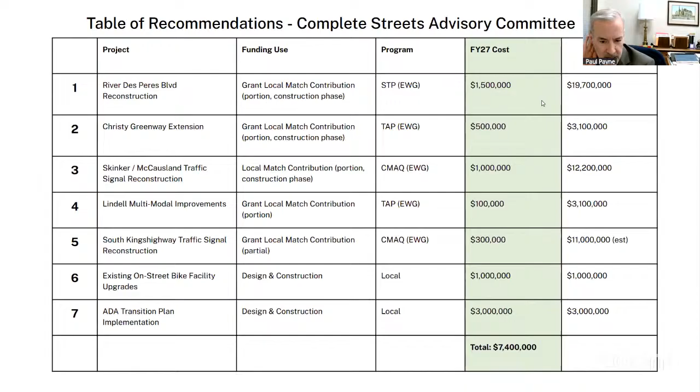Could we ask questions along the way here? Yeah Scott, do you have natural stopping points? John and I can take questions on every slide, on every project, that might be the best way to do it, since people have questions on each project. So I think we'll describe the project and the phase it's in, and then we can pause for committee questions on each project, if that works for you, Paul. Yeah, that's fine. Either put it in the chat, which I can see, although now I can't see if you raise your hand. Scott, you've got that on screen. So anyway, we'll get to it one way or the other.

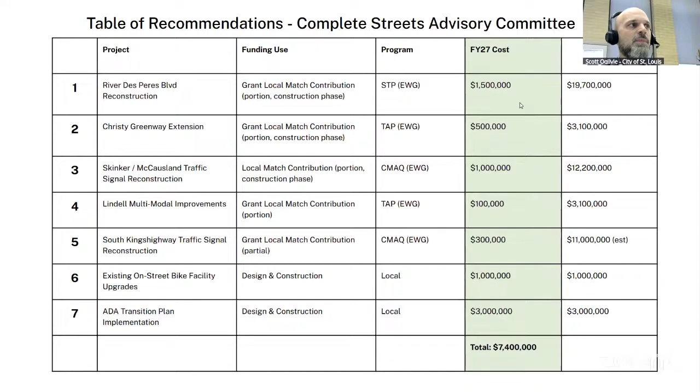Here's just a table of the same projects I just listed, with the fiscal year 27 funding request and the total project cost. Each one of these is a slide, so we'll get into more detail as we go forward. So the first project, this is one that already has a grant, an STP grant through East West Gateway. So the committee is seeking funding for some of the local match in the construction phase.

So a reminder of what this project is. This is a pretty significant reconstruction project for River Des Peres Boulevard from Lansdowne to Gravois. This section of roadway has really deficient overall roadway characteristics. It's a really old piece of roadway, poor pavement, extremely narrow travel lanes, lack of curbs, lack of guardrail in many places adjacent to the River Des Peres drainage channel. So this project would do a lot of reconstruction for just improved quality of roadway and much safer roadway.

There'd actually be a little bit of widening associated with this project, which is not very typical of city projects right now, but because this street is overly narrow for the amount of traffic it carries, there'd be construction of a center median to divide those two directions of traffic to prevent crossover type crashes. There'll be multimodal improvements, including much better bus stops in the corridor and access to those bus stops on the east side of the roadway, which are extremely dangerous to access right now, or in some cases almost non-existent. Guardrail installation in some locations, as I mentioned, and likely pretty significant changes at Chippewa, which are in design right now.

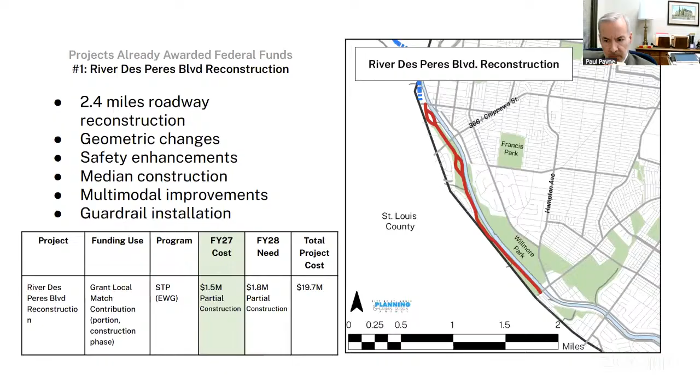I see Dennis has his hand raised. Hey Scott, what year is the construction on this one? John, do you have that handy? I think John's looking for it. I think this is roughly 2029.

So Scott, are you saying the city has already obligated 4 million, or is this the ask to complete this project? The city has a commitment to fund roughly 4 million locally, but it is not yet funded. So this fiscal year 27 ask is for what we're calling part of the construction funding, or part of the local match funding that's required to advance the project.

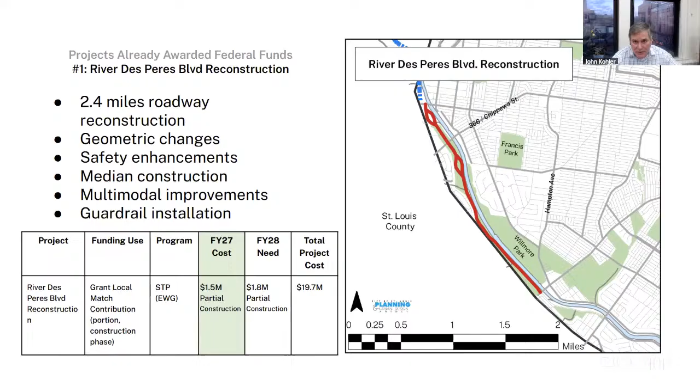Dennis asked about the construction anticipated start, and we are on track right now. It's scheduled to start in spring of 2028. Thank you. Okay, I don't see any other raised hands.

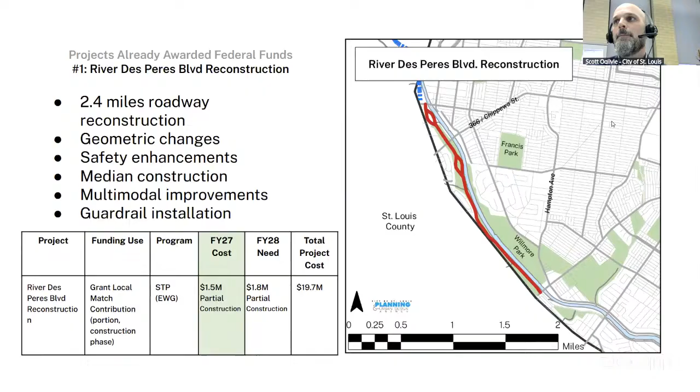So the second recommendation is the local match funding for an extension of the Christy Greenway. This is another project where the city has already been awarded a grant through East West Gateway, in this instance a TAP grant, a Transportation Alternatives Program grant. This funding is primarily limited to bike and pedestrian enhancements or improvements. This project would extend the Christy Greenway from where it ends right now at Holly Hills Boulevard through Christy Park, along Christy Boulevard to Kingshighway, where some intersection improvements have already been constructed that would link up with this greenway.

That's part of the Kingshighway ARPA corridor project. So this project would build a sidewalk-level greenway on the east side of the roadway, about 1.2 miles. The total project cost is 3.1 million, and the city share for construction is 500,000.

John? We are under design right now, probably about 25% complete. We anticipate construction start in the fall of 28. Thanks, Dennis. Is this GRG led, or is the city the lead agency on the extension?

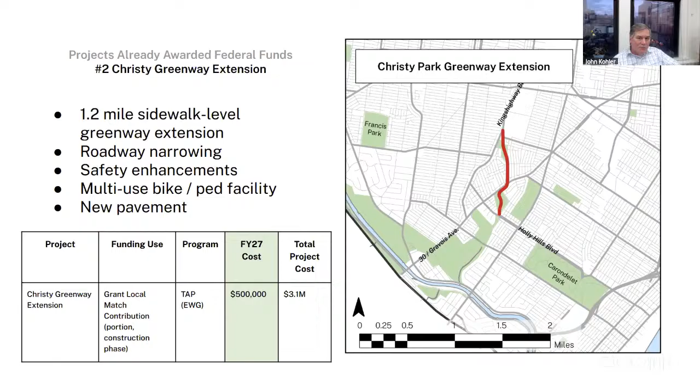This is city led, but GRG is not a funding partner in this project, though it connects into GRG's greenway system. Thank you. It also ties into the recently constructed new signalized intersection at Kingshighway, Christy, and Neosho, and it'll tie into bike lanes that were just constructed on Kingshighway as well.

Any other comments or questions here? Okay, moving on to the next project.

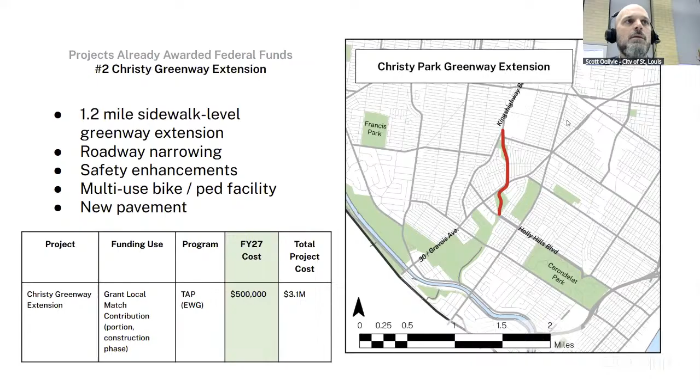Again, this is a third project that's already been awarded some funding through East West Gateway, in this case a CMAQ grant, which stands for Congestion Mitigation and Air Quality. This project is primarily a traffic signal replacement project along Skinker and McCausland, on the south end from Arsenal, to the north end where Skinker turns into Keeneland and exits the city. Approximately 20 traffic signals would be replaced through this project.

There will also be ADA and curb ramp improvements wherever the project is doing signal work. North of Delmar, there are additional sidewalk and pedestrian safety improvements that will be part of the project. Where the roadway gets really wide, it goes under the Metrolink bridge, and there's currently some deficient or non-existent sidewalk conditions, so the project will make improvements there too.

This is partial construction funding, 1 million. Total project cost is around 12.2 million.

Just a general comment about these major signal improvement projects. We as a city have been very successful in building and upgrading our major arterials. This particular project is Traffic Management Enhancement Phase 9, and Scott will talk a bit about Phase 10 on South Kingshighway. These projects improve air quality along major arterials, reduce emissions, and are looked at very favorably by East West Gateway. We get cleaner air and a better timed corridor to minimize stopping at signals and improve traffic flow.

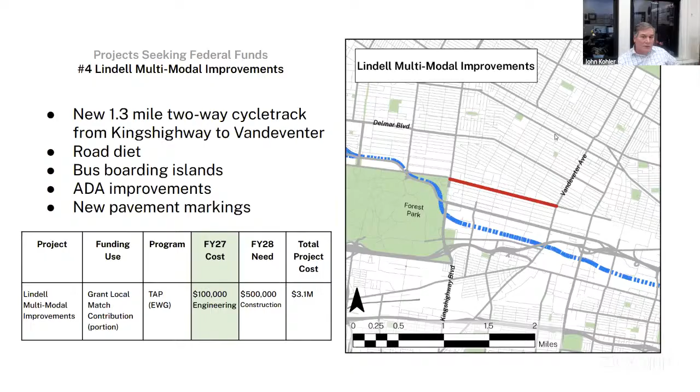This project partially originated through interest from the alderperson, a traffic study, and a public meeting held about two-thirds of the way through 2025, which helped determine residents' preferred configuration for the cycle track. It's also important to note that east of Vandeventer on Lindell, the city repaved that stretch and built one traffic lane in each direction plus bike lanes that would dovetail well into the proposed cycle track shown in red here. Questions here?

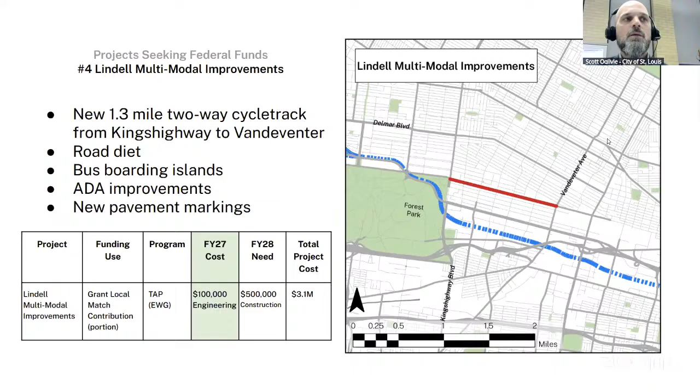Good. Okay, moving to the next project.

Again, this is an application the city has pending with East West Gateway. This is another traffic signal replacement project on South Kingshighway, going from McCree to Gravois, encompassing approximately 17 signals.

This will be primarily just a traffic signal project itself, as this corridor was resurfaced last year and had a lot of other roadway safety improvements just constructed. So the paving is new, and it's had a lot of

ADA work done in conjunction with that paving. So this project primarily focuses on replacing old signals and the underground interconnection between those signals, so they are all tied together. This is the first phase, the design and engineering phase of the project, which would be $300,000.

Not hearing any questions or seeing any hands. We'll move to the two locally funded recommendations from the Complete Streets Committee. This first one is enhancements to existing bike facilities.

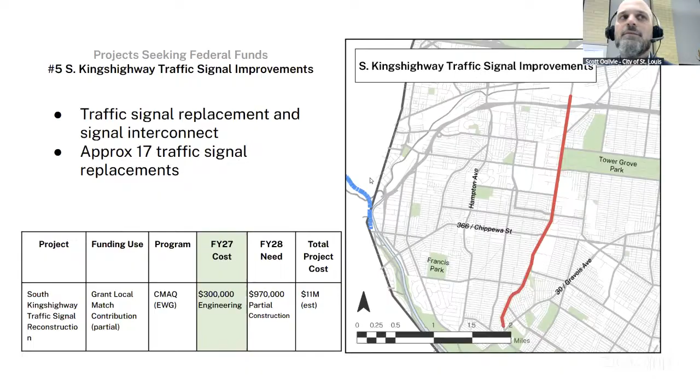And then, not on this project, South Kingshighway, but on the Skinker project - that one is primarily signals, but there's also more sidewalk work and lane reconfiguration work we'll be doing, which we talked through a little bit north of Delmar, kind of underneath the Metrolink bridge there.

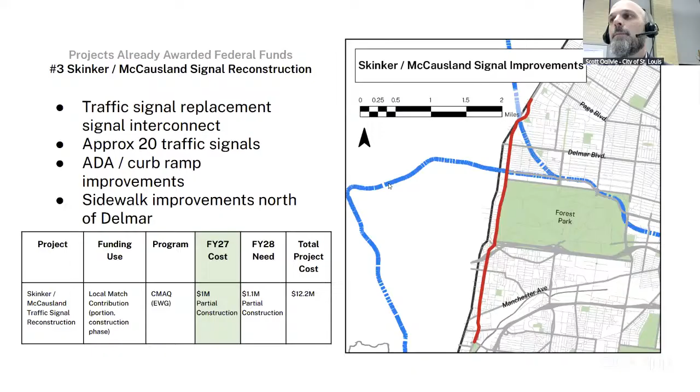Thanks, Scott. Essentially, the equipment in the traffic controller is outdated. It's like using an old computer compared to getting a more modern, faster, efficient computer that you can potentially monitor at the real-time traffic center and then modify operations with that more current equipment.

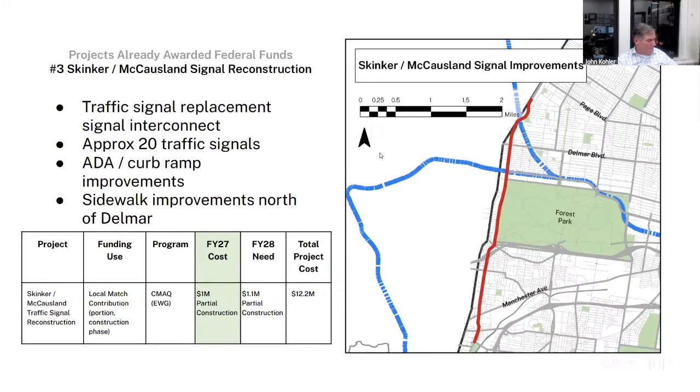Yeah, thanks guys. And actually I did have a question on the bike facility enhancements. First of all, thank you for describing what the facility is - every time I see the word facilities, I think we're talking about buildings, but technically you're working on the infrastructure and the markings and lanes and such. With the $1 million cost, is there a rule of thumb about what that buys? Is there a mileage per mile of the zebra markings or whatever it is that you're proposing to do? What's the rule of thumb here about how much bang for the buck you can get for a certain amount of dollars?

It's a good question, I don't know if I can assign a mileage to it. This is a little bit from memory, but right now we've got about 100 miles of on-street bike lanes in the city. If this figure is wrong, it's wrong because I'm going from memory. And then we've got even more mileage of what we call just signed share-the-road routes, which isn't a bike lane - it's just a sign that says share the road and that share marking. It doesn't all need to be refreshed, but probably 50% of it does need to be refreshed, and that's limited really just to replacing those pavement markings, like the bike lane symbol, maybe some signage.

And then we've got a lot less mileage in terms of protected facilities - just really like a few miles of fully protected, parking-protected on-street facilities. And the only place that really needs a lot of work there is Union. The other ones are newer and are in good shape.

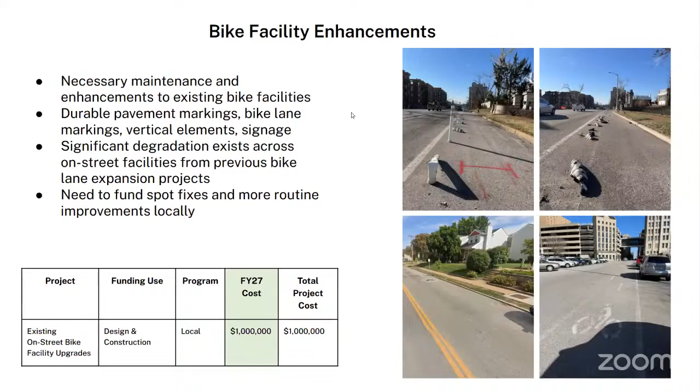So moving to next: ADA transition plan funding. This would be an annual allocation. I think this would be the 4th year that there would be an allocation towards the ADA transition plan, which was officially finished in 2024, but which we really started using even before that. So the transition plan speaks to making all the public services, facilities, and transportation facilities the city has accessible over time. The plan itself identifies some key improvements to make and highlights important facilities we need to upgrade in city buildings and city programs, but also sidewalks and right of way.

I think this program, since we started a few years ago, has been really a huge success and has allowed things like parks, sidewalks, restrooms, entrances to buildings, all types of things that are needed to make sure everybody can fully access all public services and buildings, to make those things accessible. The funding is generally being used where there is not another large scale project to do kind of spot improvements to make things accessible. And the recommendation this year is $3 million into that program.

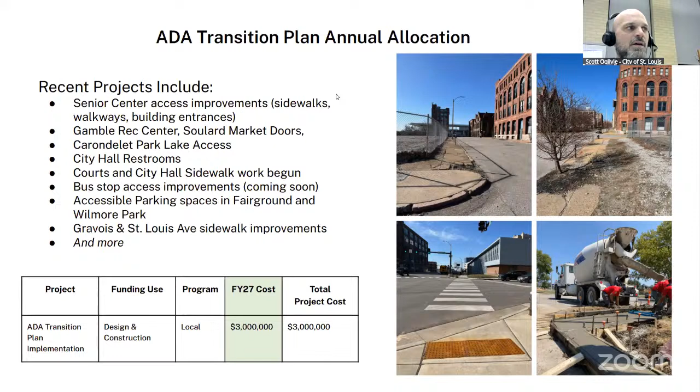There's been accessible parking spaces built at Fairground Park and Wilmore Park. There's currently sidewalk enhancements on Gravois and St. Louis Avenue, which were some of the highest priority locations in the ADA transition plan, where we don't have other projects. And there's lots more things, sort of too many to list on one slide. But I think this has been really a real bright spot in recent years on making St. Louis more accessible to all residents.

And I think David is on the call. If David wants to expand on anything I said, I think he's welcome to. I think you did a very good summary of it, Scott. It's important to always, in my mind, to point out that what we do is looking for areas that are not accessible and are not likely to be a part of some other project, so that we're trying to make the whole city accessible and let the other projects comply with ADA standards as they're constructed.

One of the other features of all of this is that we get a fair amount of federal money for streets in one way or another, but there is very little federal money for sidewalk improvements. So we are doing a lot of sidewalk improvements, a lot of places. And we also are very interested in the public telling us where there are problems. Because, for example, we have somebody who has lived in an area where used a wheelchair, and to get to a bus stop, he had to use the street. There was no other way to do it. And so we can give that a higher priority. And so I'm one of these people who says the more complaints we get, the better, rather than the other way around. So everybody is welcome to make suggestions.

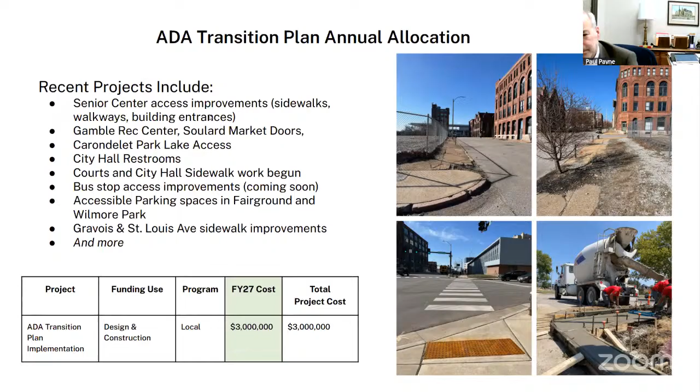This slide is a reminder that we as a city have a lot of projects all over the city, north, central, and south. We're in a period where we're doing a lot of work. We have 7 projects mentioned in the capital committee request, but I want to emphasize they're far from the only projects. We have projects big and small in every corner of the city, including the ARPA corridor work and other notable projects.

This is just a short list, not all of them currently under construction, including Tucker Cycle Track, full reconstruction of North Grand, the Brickline Greenway through GRG, Market Street which is just wrapping up, Tower Grove Connector, Manchester Chouteau which MoDOT is moving into the real construction phase of now, and the 20th Street Greenway or cycle track which is fully under construction. So a lot of exciting projects in addition to the ones we mentioned.

And that concludes my portion of the presentation, and we move to Kevin Trapp. Hopefully Kevin is still here. He's going to talk about bridges. Lisa had a question, Scott.

Quick question about the Manchester Chouteau project. We live and work along Manchester, in the Chouteau area. MoDOT said to us when we asked about bike lanes and some protective measures, because this area is so dangerous and people love to drag race down it, that they can do certain elements of a road project, but the city had to handle the vertical elements. Is that just the zebras and things like that? I wasn't exactly clear on what we do as a city versus what MoDOT can do for our roads to make them more pedestrian and biker friendly.

Sure. So MoDOT maintains several corridors in the city where we as a city really own the right of way, and through a maintenance agreement with MoDOT, they primarily maintain curb to curb. Through a lot of dialogue between MoDOT and the city, we worked through most of that on the Manchester Chouteau project. Part of that project is MoDOT building protected bike lanes, so that roadway cross section is going to change later this year, and they will have the vertical elements. That'll really be a first for MoDOT -- they haven't built that type of project anywhere else in the state.

But if you squint, you can see on this map that we as a city have a lot of other bikeway infrastructure crossing or intersecting with that section of Chouteau. So they maybe got out of their comfort zone a little bit to build the protected bike lanes. Those are coming this year.

Just a quick add on to that -- as that project was developing in the public engagement and design phase, MoDOT in the middle of that process decided to fund several more millions of dollars for safety improvements on Manchester. As part of that funding commitment, they're now including raised concrete medians to protect the bicyclists on the outer edges of the roadway. So your conversation might have occurred before that additional financial commitment.

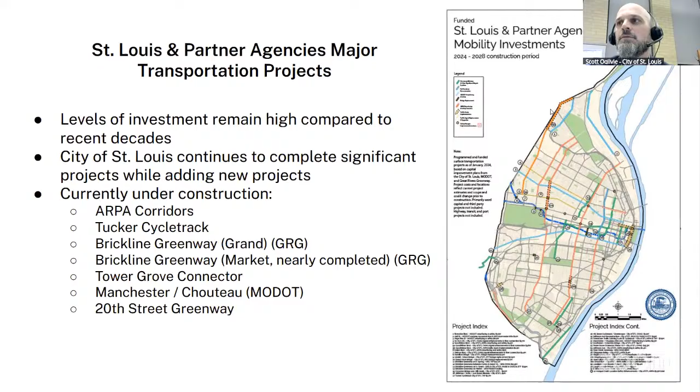Well, I thank everybody for going through these recommendations with me, and I think we can jump to Kevin Trapp now to talk about bridges. Good evening, everyone. I won't take nearly as long as Scott, but I just want to introduce you to a few bridge needs we have in the city.

The first two I'm going to talk about are actually design is essentially complete. We are going through our final approvals with the state to get permission to bid, but due to some unfortunate delays during design, construction costs have overrun what we have programmed.

The first is Compton Bridge. This is going to be a complete reconstruction of Compton between Chouteau and Spruce. Not just replacing the bridge, we're also going to completely replace the streets and sidewalk for that entire corridor. We're going to have a 4-lane bridge, and on the east side, we're going to widen it so that we have a wide multi-use bike ped facility.

It will connect the bike lanes on Chouteau up to bike lanes that MoDOT will be installing on Spruce as part of their upcoming I-64 project.

Our construction budget is about $3 million short. So that is what we're here to ask for today.

The shortfall is due to right of way. Because we're widening the bridge, we had to purchase right of way from the state, from multiple railroad companies, and from a few different businesses. It took longer than expected. Delays with the supply chain that we've all hit on in the past few years drastically increased the cost of steel and MSE walls, which are two of the main components of this construction, which is why our budget did not hit.

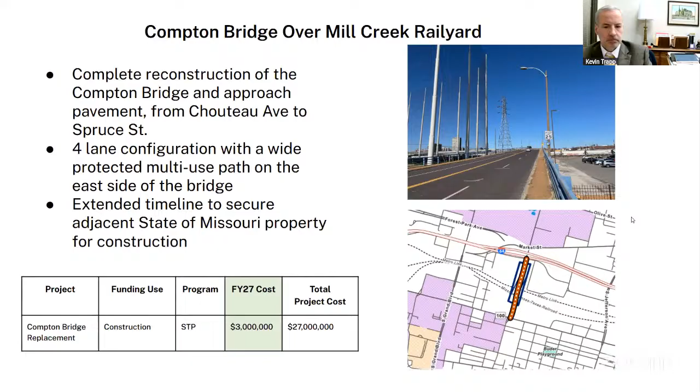Moving on to Southwest and Columbia, which are actually our second and third oldest bridges in the city. Columbia we had to shut down a few years ago because it was severely deteriorated and semis were consistently driving over it despite it being load rated for about 10 tons. We had to make that difficult decision, but it really wasn't that difficult because that bridge couldn't take it. This is Southwest and Columbia, just a little over half a mile west of Kings Highway.

The two bridges are right next to each other. They are not tall enough to get over the height of modern trains. This bridge has actually been struck twice by trains, so we do need to raise it, and unfortunately we can't raise them where they're at. So the solution we came to is that we're going to construct one single bridge coming through the middle. Southwest will have a bit of an S curve—it'll come down, the new bridge cuts through the middle, and then ties right back into Southwest.

We got hit with a big environmental delay due to a building on the National Registry that we need to tear down. It took 2 years to get approval from the US Department of Interior to tear that building down, which caused our construction budget to miss, and we're $1 million short on our budget. This one is also nearly complete with design. We look to be bidding this and Compton this spring, and we just need a little bit more money for construction.

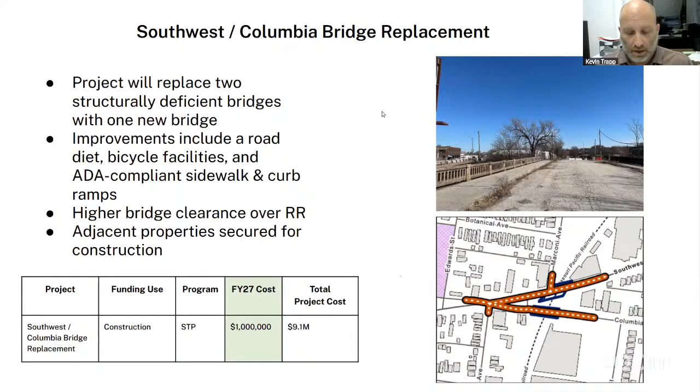Moving on to Old Stable then. This is a small bridge in Forest Park, right outside the lower Muni parking lot. It's probably about our fifth oldest bridge. It was built in 1922.

We actually applied for federal funding on this in February. We'll know from East West Gateway, probably in the summertime, if this one gets awarded. We'll have a good indication in early May when East West Gateway staff makes recommendations to the Transportation Planning Committee.

If we get awarded the grant application, our design is already funded. So we will be looking for $660,000 for the local match of construction, which we wouldn't need until fiscal year 28.

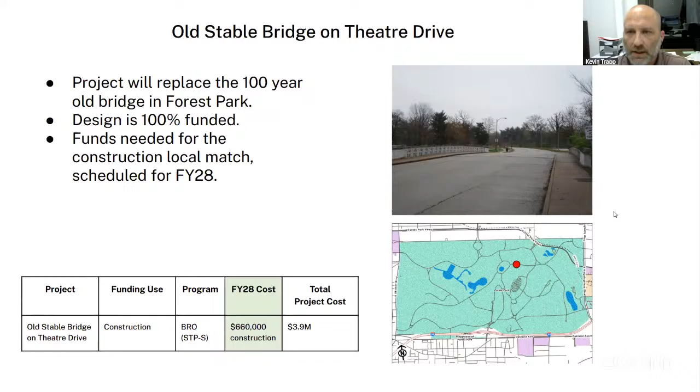Yes. So I saw a board bill this week to turn this over to East St. Louis. Is that, and full disclosure, I didn't read the whole board bill, but is that with the condition that the city will demolish it and then turn it over to East St. Louis? No, we are trying to work with East St. Louis. There's talks that they may take over ownership of this one. It is not a done deal.